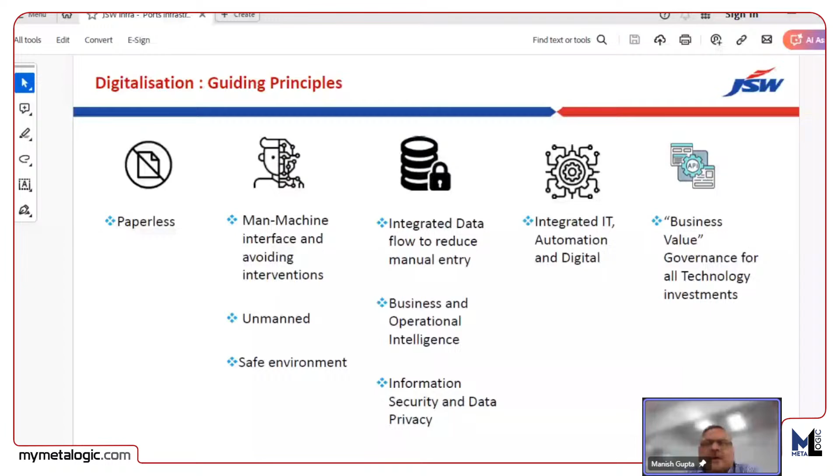So what we have done, I would like to explain. In our case, we have tried to ensure all the stackers and reclaimers in both our terminals are PLC controlled and SCADA based, and they have a control room wherein you can monitor their feed rate, the load rate of the conveyors, and the loading into the vessels, all sitting in a control room.

So just to explain what we have in a terminal: in our iron ore terminal, we have a twin tippler, a single tippler, connected to a yard through a conveyor line. Then we have yards where we have stackers, and stacker reclaimers as well, which can be used both for stacking and reclaiming. These reclaimers are used for loading into the vessel. We have two ship loaders with a capacity of around 7,000 metric tons per hour, so dominantly we try to finish loading a cape size vessel in about 1 to 1.5 days.

For utilizing this heavy equipment and the conveyor, we are trying to use minimal manpower, and all of this is done having a control room, where all the stop-start of our equipment as well as conveyors are controlled. We use a lot of RFID because many trucks come in for iron ore, along with the rakes, to connect the traffic, understanding what is moving out of the mines, and what is finally coming to our terminal, so that we can regulate traffic within our terminal premises as well as outside.

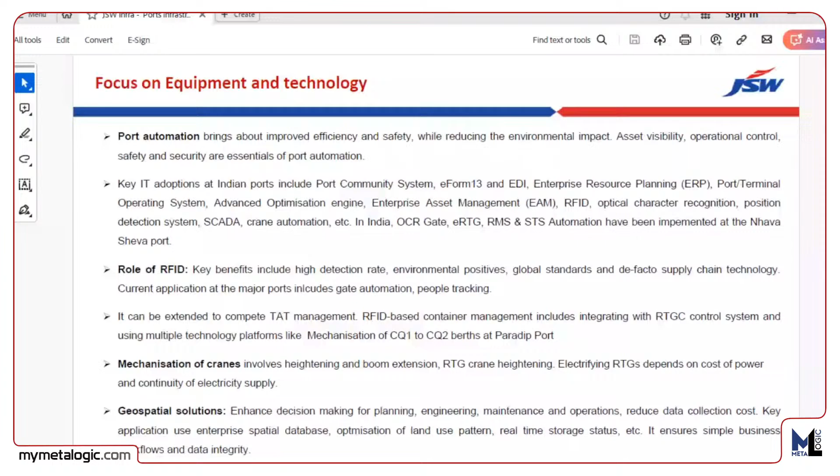Same way, we regulate our traffic of rakes by looking at the details available in FOIS, and this is integrated with our internal system.

We have mechanized cranes that are normally used for moving some of the items here and there within our premises.

We are trying to use geospatial solutions, where we map the storage area, and based on the profile of the storage, we manage how the stacking has to be done. Finally the equipment, the reclaimer, is guided as to how the reclaiming is done, so that it is more efficient and productive, because you spend a lot of power using this big equipment, and if you can maximize your utilization of this equipment, you save cost.

That's the whole principle of using the new virtual solutions and the equipment based on SCADA.

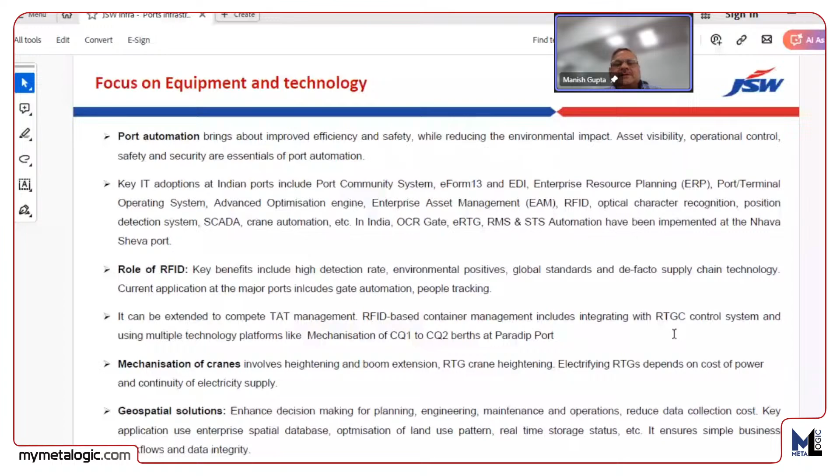When we make the architecture of the whole system, I am not only talking about a bulk terminal, but the overall port. First of all, it has to have automated marine operations.

As of today, all our ports normally have a tugboat and a control room where they come to know from the vessel that it has arrived, and the pilot along with the tugboat goes to get the vessel in. This can be better managed if we know what vessels are coming in, and this can be integrated with information to the various berths and terminals within the port. Thereby, the stoppage time of these vessels can be reduced.

Same way, we have automated gates for bringing in the containers so that there is no stopping or choking at the point where they enter the premises.

Then automated and remote STS for unloading containers, e-crane operation.

Smart rail operation is like what we do manually today, we try to get information from railway on where the rake is, and then manage the system inside. But if this can be integrated with our system, which has to happen in future, then our operations would be much better. I talked about the yard management, then integrated stacker and reclaimer, which we already have.

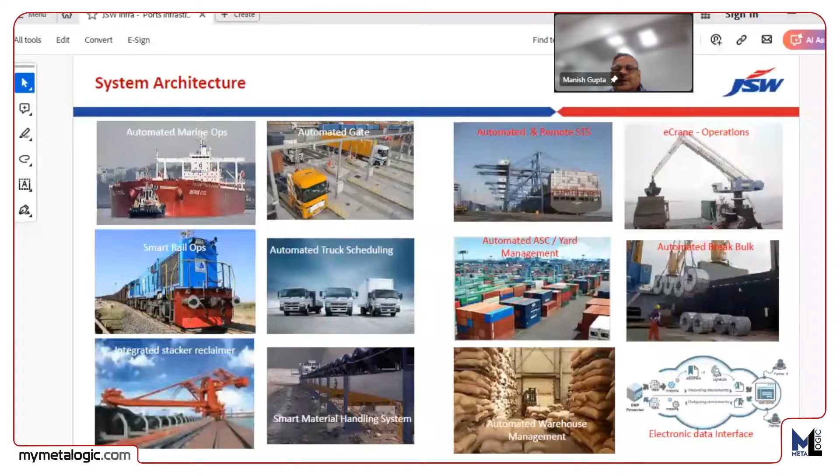If you see an integrated system, we have three parts: one is the terminal operation, second is the business operation management, and finally the business performance management. So marine operation or vessel operation, storage, warehousing, receipt, gate operations, all these things come under terminal operations, which we try to do by using equipment integrated with our IT systems.

Now the reports and functioning of a terminal, that is finance management, procurement and inventory, asset life cycle, project management, HR, sales, marketing, these are done through an SAP system.

These two systems have a common portal where the KPIs of the ports are managed, like the TAT of a truck, the TAT of a vessel, how much time it's going to take to load, and how much time we have taken between two vessels. All these parameters are governed so that we can improve by having this information.

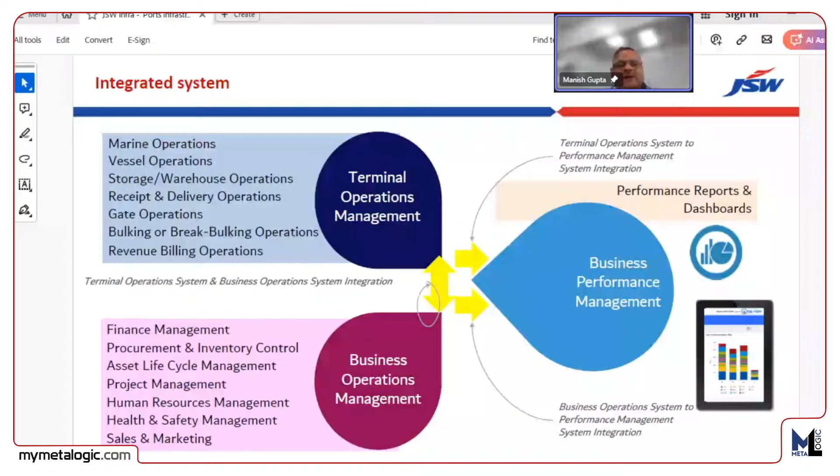So when we have a technology-driven port, we definitely have more productivity. One, we save time by tracking and monitoring. While using this equipment, the handling losses are minimal, and we use DFDS system and filtering systems so that the environment is protected.

If we are effective in bringing down the TAT, whether it's rake, truck or vessel, we try to bring down the pilferages, that is the damages, and thereby we become highly productive.

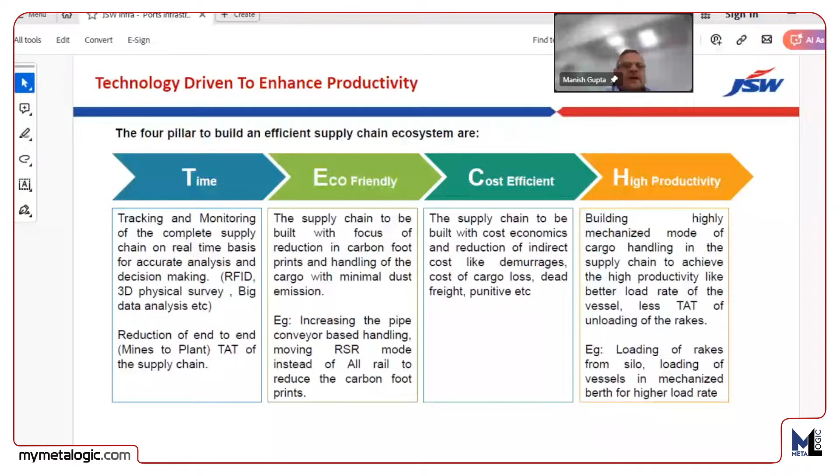Now, these are the things which are used now and are being advocated in future ports, so that the environment can be protected, and the cargo can also be protected, because if there is high moisture, it's very difficult to transport the cargo. And if there is more dust, the whole environment becomes dusty and it's not environment friendly.

So we are trying to make these kinds of structures, where our reclaimers and stackers will work within these structures and operate in the way they were operating earlier. The only difference is the environment will be protected.

I am also going to share some glimpses of our surveillance system, where we use digital surveillance and exceptional analysis. The whole port has a lot of cameras, around 200, which are Bosch cameras with analytics. If there is any deviation to the way things have to work, for example, if a person is moving around in an area where he is not supposed to move, there would be an alert and the security will sound off.

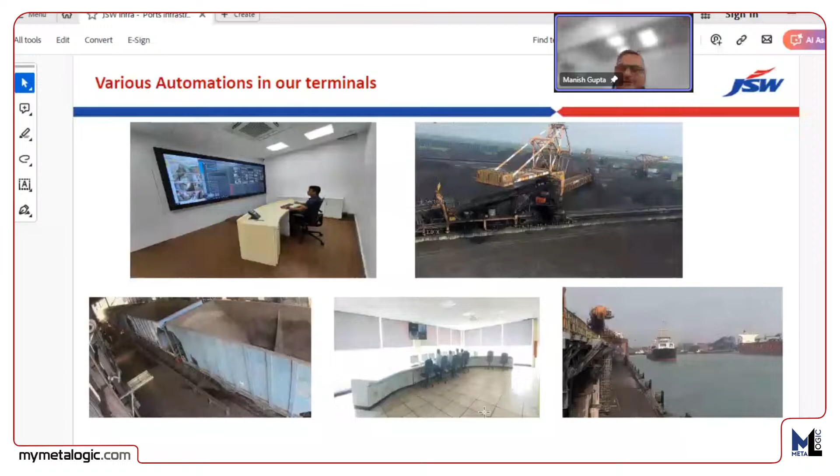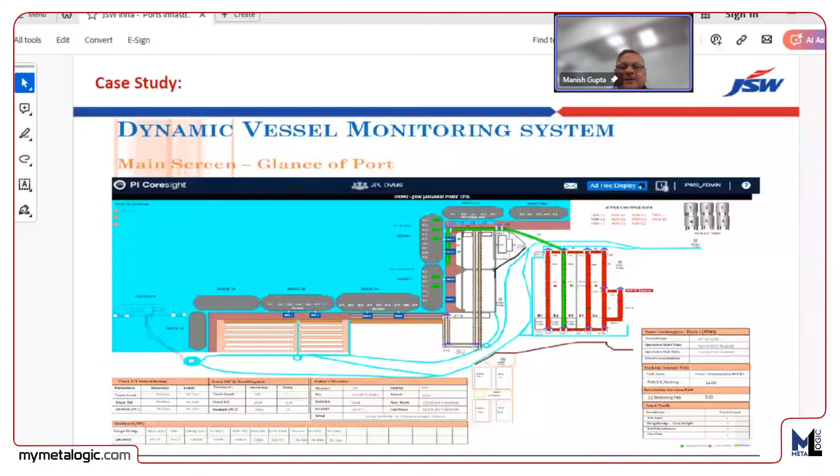So this is a glimpse of that. Generally, for a particular berth, it shows the various hatches, the quantity to be unloaded or loaded, and when it is being done, showing online in real time what unloading is happening and where, which yard it is going to, so we can be more productive. It shows which stacker is being used, which conveyor, from which hatch it is being taken out, and what time is being taken.

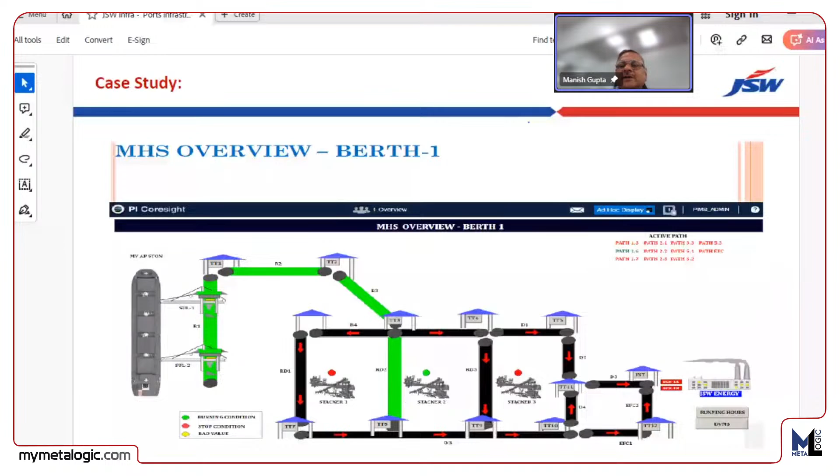So this was my presentation, a glimpse of that. But if you have any questions, please feel free to ask me.

There is a question from Mr. Saju Thomas. He wants to ask, how can we reduce the handling losses at port while handling bulk cargoes, specifically coal and iron ore? This is an open question where everybody can contribute.

Hello Mr. Saju. Basically, we have a lot of challenges in bulk handling where there could be handling losses. But if you compare these handling losses vis-a-vis manual handling, these losses are minimal. Now, how we can reduce the losses?

It depends on how the cargo is coming in. If in a rake the cargo comes in and by some chance has formed a slurry, the cargo sticks to the sides of the box and rake. We try to unload, but then there is still some cargo left over. But once it comes to the conveyor and then towards the plot, it doesn't fly anywhere because of the density, so the cargo is safe.

Because we are reclaiming again and it is going via conveyor to the ship loader, the cargo handling losses are minimal. So what we need to do is find a mechanism by which we can scrap through whatever is not getting unloaded because of the slurry or choking nature. If we can unload the total cargo within our terminal and bring it to our yards, then the mechanized terminals are the best to operate with.

So what we've discussed on this topic is the advancement of bulk material handling management at the port sector. We have taken 3 key initiatives: first, infrastructure and its development in ports for handling bulk cargo vessels; second, automation and digitization of operational activities handling the cargoes; and next, environmental concerns related to bulk cargo handling in the port sector. The first and foremost topic is how to handle a bulk vessel in the port sector.

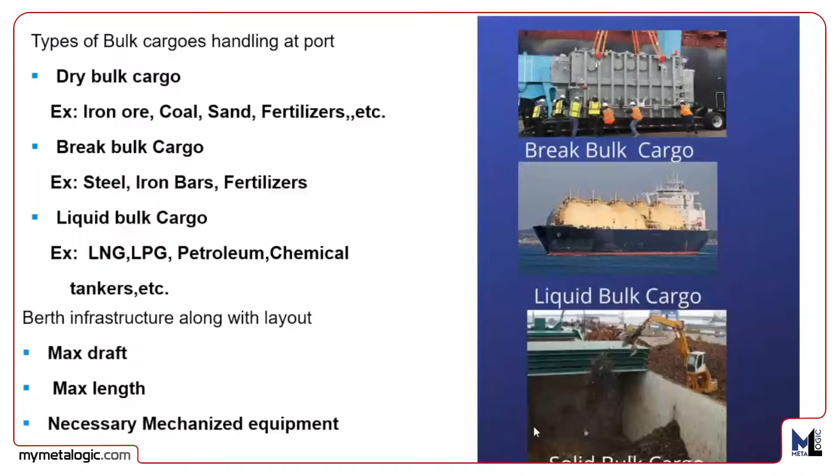Before that, I'd like to give a brief view of what bulk cargo is and what types of bulk cargoes we handle in ports. Generally, bulk cargoes in the port sector are dry bulk cargo, break bulk cargo, and liquid cargo. Dry bulk cargo is generally uniform in nature. Coal is an example of dry bulk cargo, iron ore is also a dry bulk cargo, and sand is another example of these kinds of cargoes.

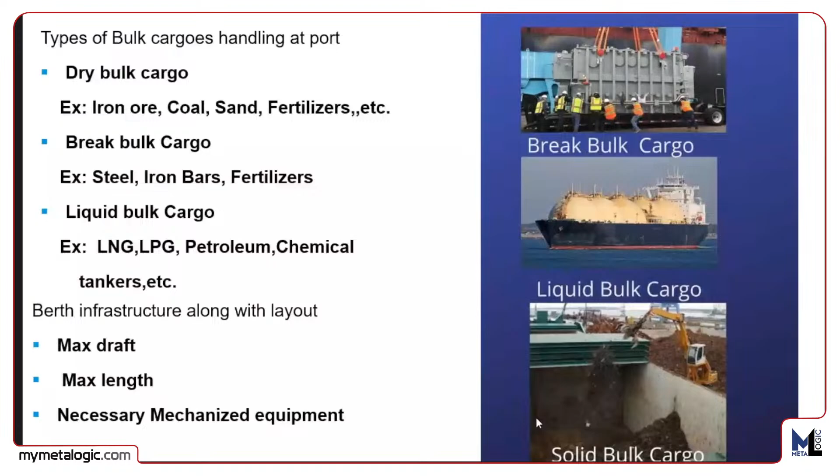This kind of cargo is uniform in particle structure and can take more volume in a single vessel, with geared or ungeared vessels. Generally, ungeared vessels handle more volume, bringing cargo from one country to another where resources are scarce. For example, we can export iron ore from India to China to overcome the scarcity of iron ore existing there, which is needed for manufacturing steel products helpful for our real-time livelihood. Next, liquid cargoes.

When we consider liquid cargoes - liquid petroleum products, natural gases - and chemical tankers, which bring bitumen, ammonium nitrate, and similar cargoes from one country to another, these can be transported through the maritime sector because it offers transportation at minimum cost compared to other sectors like railways, roads, and air cargo.

When we come to berth infrastructure, it must have capacity to handle bigger vessels and operate with maximum draft. The keel at the berth side must accommodate higher volume vessels, meaning 4 lakh DWT or above, handled freely without tidal issues. That's why draft is the biggest concern when handling bulk cargo vessels.

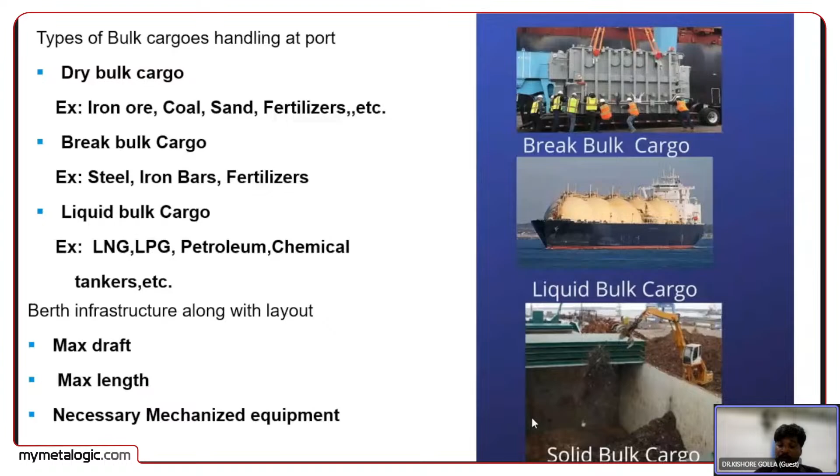The length of the berth must also be taken into consideration when handling bigger size bulk material vessels in the port sector. The equipment required for handling varies from one cargo type to another. For liquid bulk cargo, operations can use a pipeline structure, which connects the port berth directly to the destination location as per environmental safety and safety standards.

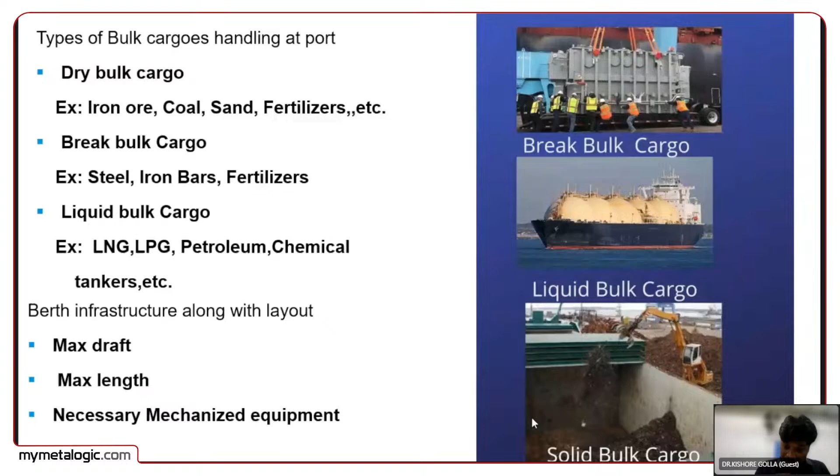For other cargoes like dry bulk cargoes, operations maximize the use of ship loaders or unloaders along with ship cranes, HMCs, connected with conveyor belts. The size of vessels varies from one cargo type to another, based on DWT, which must be considered for handling bulk material in the port sector.

For dry bulk and break bulk cargoes, the DWT changes and the size of the vessel changes accordingly. Handymax, Supramax, and Panamax vessels are mostly handled as per the infrastructure existing in Indian conditions, with allowable draft from 12 meters to 14.5 meters. To handle bigger size vessels at a port, you need to increase the draft and the length of the port infrastructure.

Generally, the port sector works on a timely basis, with charges mostly taken on an hourly basis. When calculating port performance, turnaround time and OSBD come into the picture, along with efficiency, which is considered when increasing berth traffic by handling more vessels to increase efficiency and key performance indicators of the port.

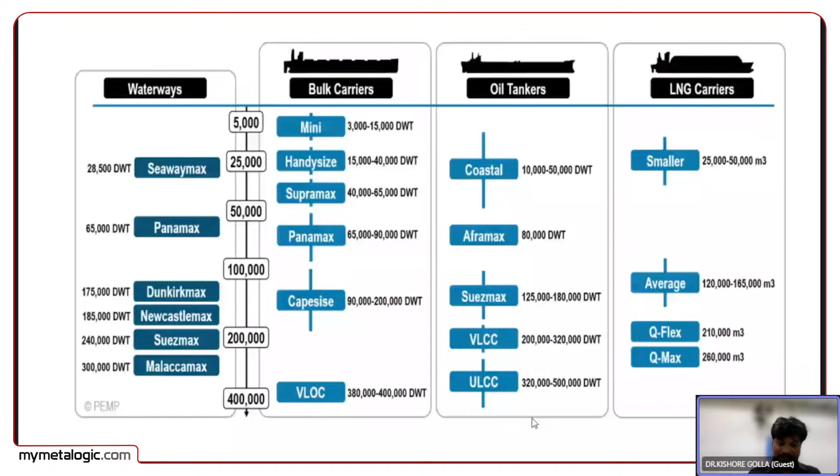Generally, the equipped infrastructure required to handle bulk cargo in the port sector includes ship loaders, ship unloaders, grabs, ship cranes, and HMCs, where we can handle a larger volume of cargo at a time from ship to shore and shore to ship, depending on the type of operation - either import or export.

The movement of cargo also takes into consideration the conveyor belt. For handling these kinds of things, this infrastructure plays a crucial role in operations - the grab capacity, the size of the grabs, and the mechanized equipment we use at that wharf or berth will help improve the turnaround time of the vessel, as well as OSBD of the vessel.

How much cargo we are handling on a particular day will be calculated based on that, and the specific gravity of the cargo also comes into the picture while handling the vessel, by increasing the volume as well as decreasing the time duration it is going to stay at the particular berth.

Next, storage facilities existing in the port sector. While discharging cargo from the vessel to the wharf, we need to evacuate that cargo from wharf to the allocated plot, either in open shed or closed shed, depending upon environmental conditions, or allocated space. This cargo movement can be done with the help of conveyors, or with fast-moving gate automation techniques, which help minimize traffic congestion in the port sector.

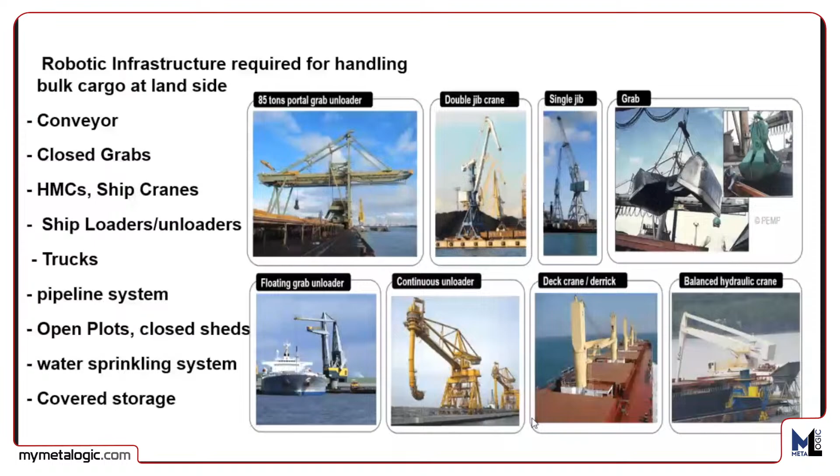Next, for movement of cargo through conveyor or ship loader, this can be done with the help of balancing the cargo, sprinkling of water or fog cannon machines for the cargo, to minimize the flow of cargo due to the nature of these cargoes, like coal and iron ore, which can flow kilometers away from one location to another, impacting environmental conditions in the port as well as city-based ports or port cities existing in the world.

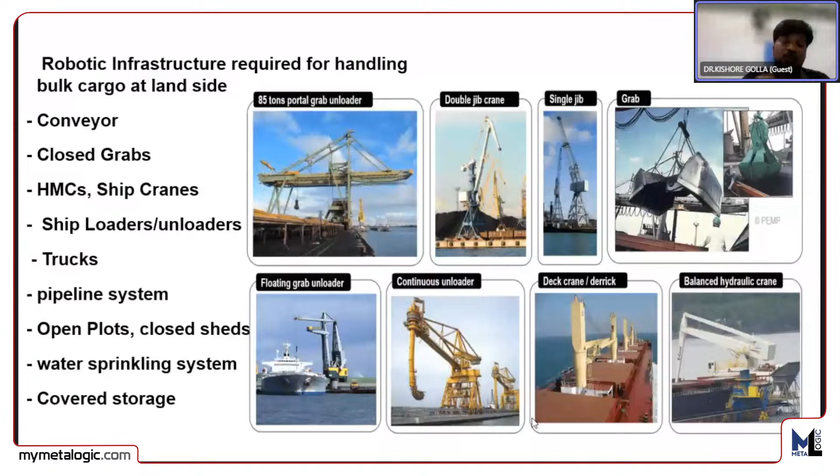The basic structure will be like this. Whenever we take any bulk vessel, it will come as ungeared vessels or geared vessels. If it is an ungeared vessel, it will come with hatches. Each hatch will have uniformity in nature and capacity to handle the same size of cargo, to balance the vessel's movement in the sea water.

To balance that cargo, we also give tolerable fog sprinkling or water sprinkling along with the cargo, like coal, iron ore, and others. Whenever the vessel comes adjacent to the berth, the ship loader or unloader comes into the picture, and that unloader takes the cargo and keeps it on the conveyor, which takes the cargo to the designated plots.

So considering these advantages, the major ports can show an interest to handle bulk vessels in the port sector to improve their performance standards. These standards will be taken as per IMO norms and MARPOL regulations, which will help us handle the vessels while minimizing the environmental constraints existing in the port sector.

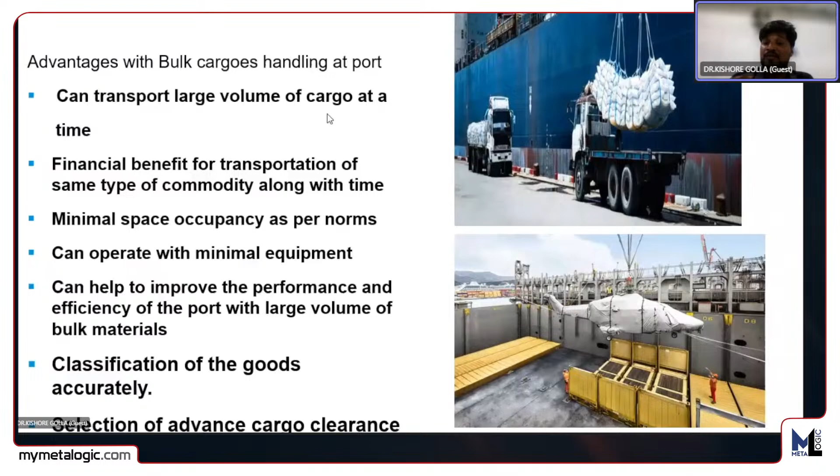Bulk material occupies less space compared to other materials. Take containers for example - you can operate with 20 feet or 45 feet containers, and based upon that the volume of cargo changes. Within that same space, you can operate more bulk cargo like coal or iron ore on a designated plot. Within that plot, there's a permissible limit you can operate within, but the volume will be increased compared to container cargo handled in the port sector.

Also, machinery helpful for R&D projects can be transported through the port sector only. There you can operate with a lower price for that cargo movement in the port sector, based upon the total tonnage taken into consideration.

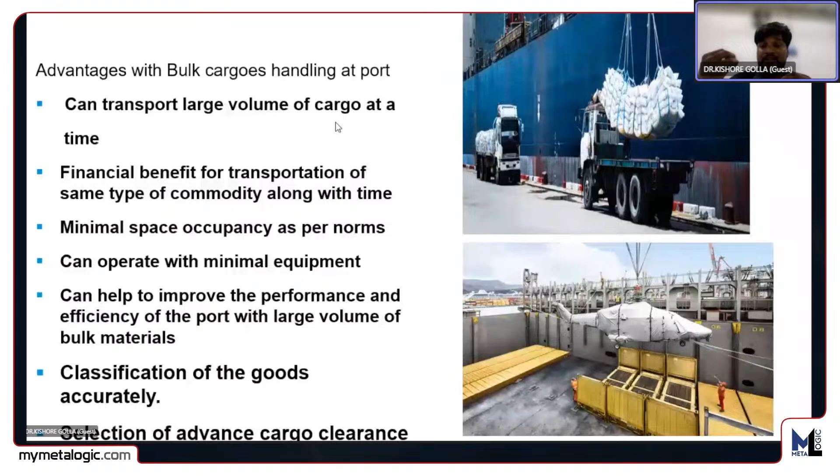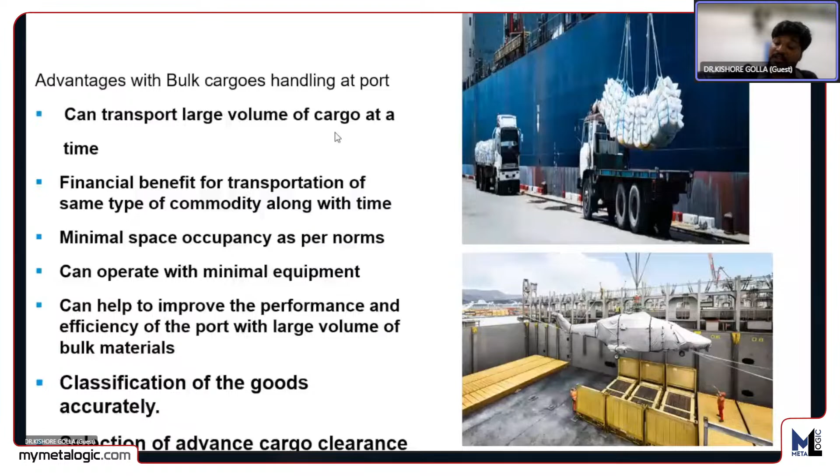Next, advanced cargo clearance. If you take bulk cargo as break bulk cargo, it can be kept in bag format - for example steel bars or fertilizers. You keep it in bags and transport those bags within the vessel as well as on the wharf side of the berth, to minimize cargo wastage, as per the earlier discussion with Manish Gupta ji.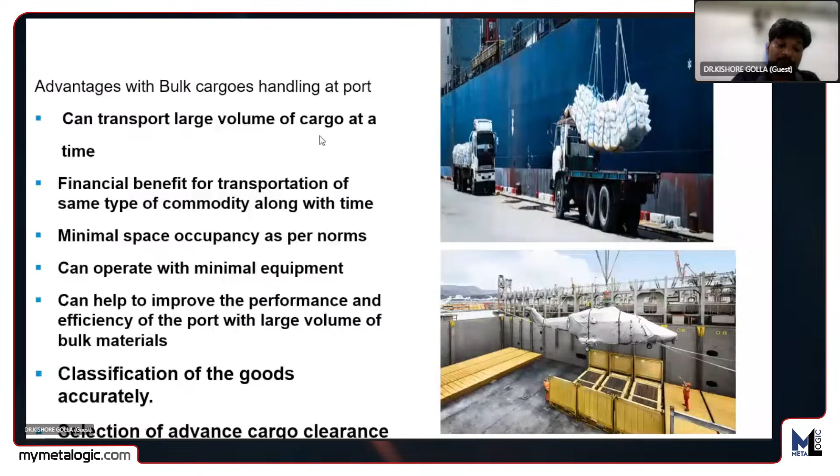You can see how the ship unloader handles cargo and transports it for trucks as well as conveyors. This helps as per standards with the closed conveyor - when handling that cargo, there is minimization of spillage of cargo when moving it through the conveyor. That point we have to note here.

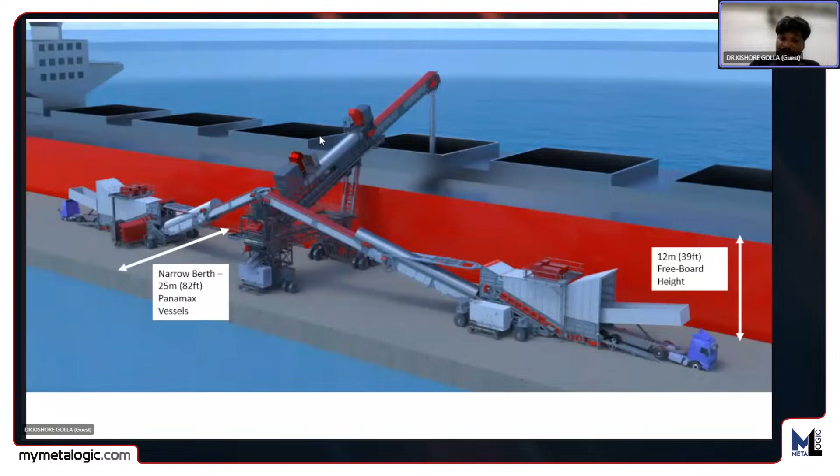When considering environmental concerns, as discussed earlier, dry bulk cargo can fly across kilometers away from one designated plot allocated for this dry bulk cargo, affecting the city or citizens living nearby, causing environmental concerns. That's the biggest problem. Along with that, there's a possibility of carbon emissions from firing of coal cargo, with combustion along with hot air.

Another constraint in bulk cargo material management is human capital. If workers don't have the technical expertise for handling mechanized equipment existing in ports for bulk cargo, there's a possibility of cargo spillage within the roads of the port as well as the infrastructure designated plot allocated for that particular cargo.

To mitigate these things, the existing technologies we can handle with automation, along with digitalization for vessel clearances - as Manish Gupta ji already shared in the earlier demonstration about the vessel clearance system for document clearance, what kind of operating systems are available presently in the maritime sector of India.

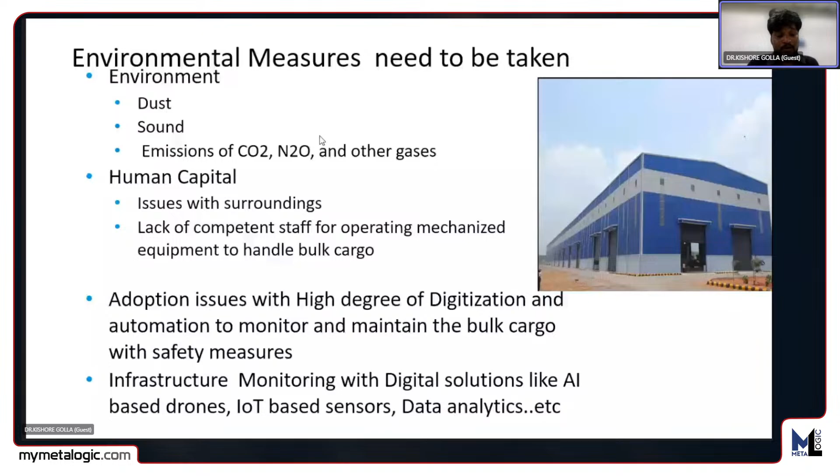To mitigate that, we have to give moisture - mixing water at a tolerable level to suppress the cargo to the designated location, and also to mitigate the combustion with the hot air which flows in the ports.

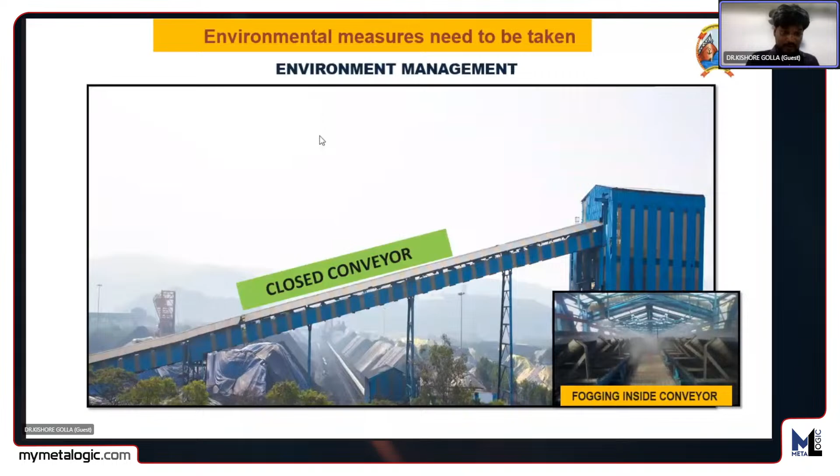Next, the one under environmental constraint: what we have seen earlier is that if you keep the cargo in the open manner, it can fly across the city. We can mitigate that flying with the help of closed storage sheds. Whatever cargo we keep inside the closed storage sheds will remain within the closed shed only, restricting the flying of cargo from the port to the city side.

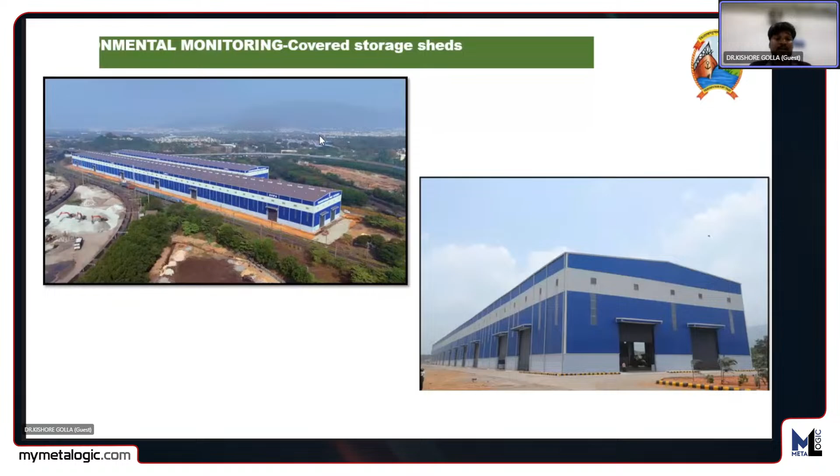No issue, I can keep that one, but I just want to show how practically this kind of operations are happening in the port sector. If you can allow me another 5 minutes, it will also be helpful for the audience to better understand the operations.

You can see here what we discussed now: the flying of the cargo as well as combustion of the cargo with the air. Both of these things you can see here. The smoke is coming due to the combustion, and also the flying of coal dust within the port.

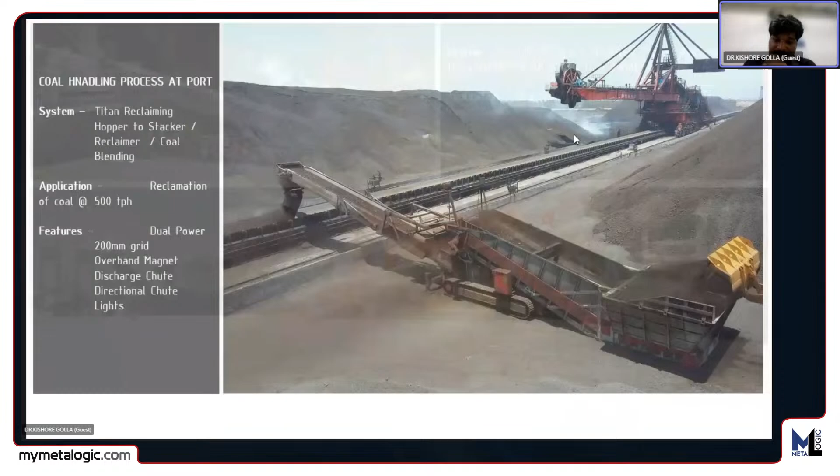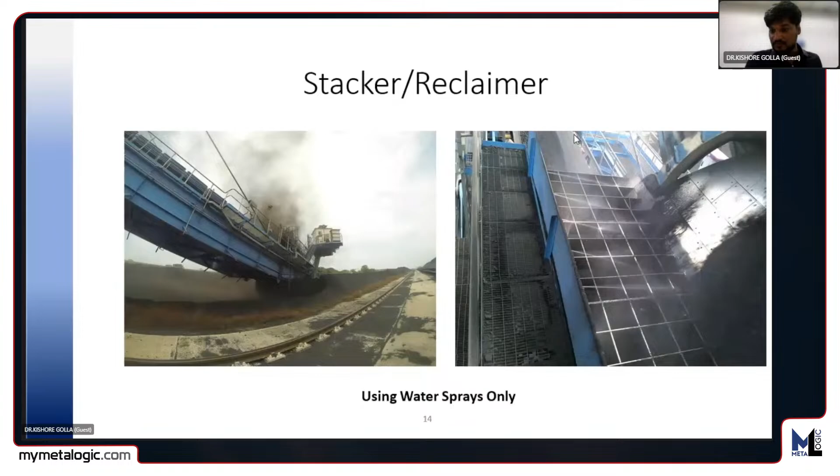And the handling of gypsum in the port, you can see here with the help of ship loaders. The stacker and reclaimers also transport the cargo within the port, and we can suppress the flying of cargo with the help of fog and the mixing of moisture.

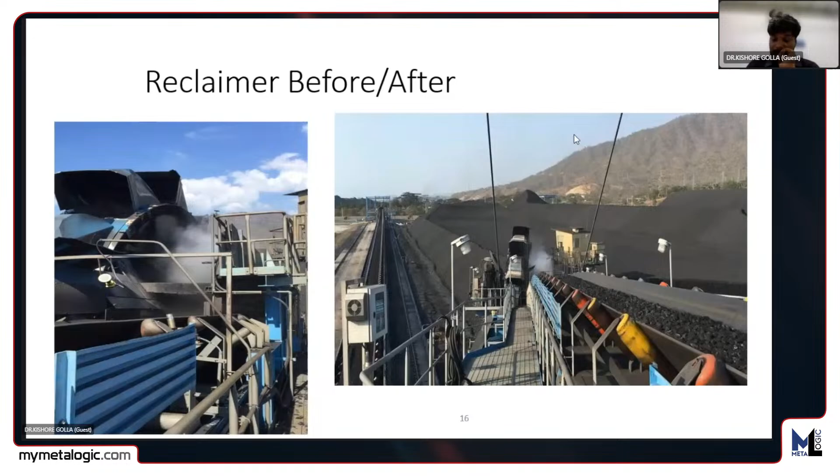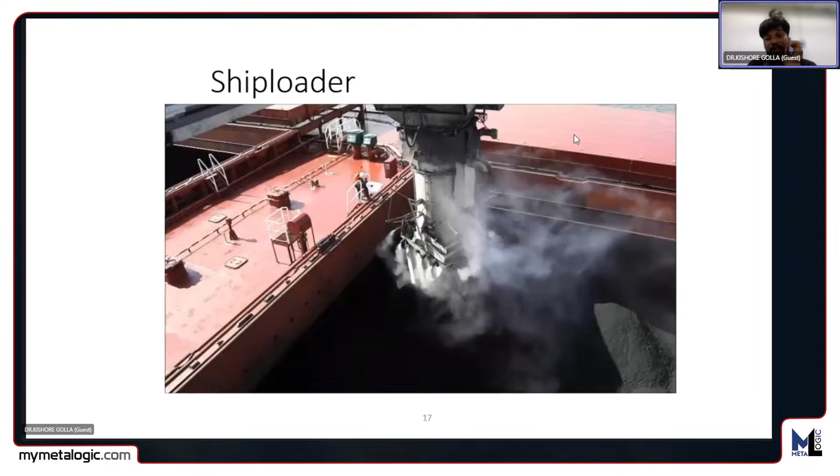These are the different kinds of techniques and mechanized equipment we use for handling bulk material in the ports. You can see here the loaders, how cargo can be loaded into the vessel with the combination of fogging, to a tolerable level, to keep the cargo balanced in the vessel.

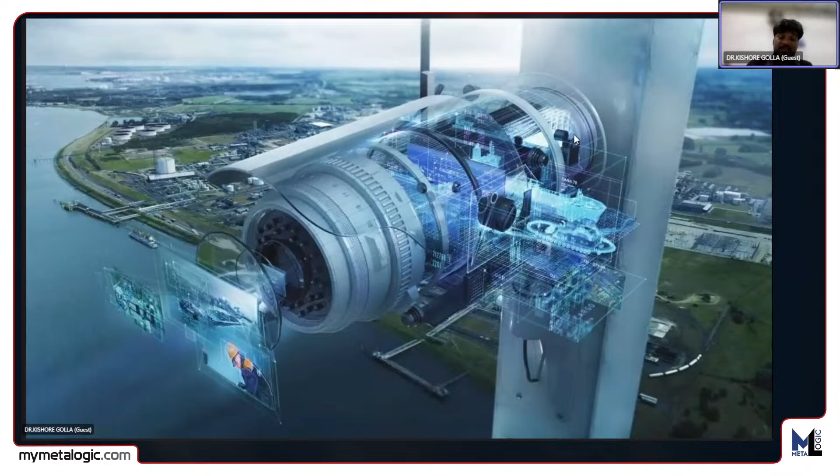Next, digital technologies available for us to handle robotic equipment used for handling bulk cargoes in the port sector. The first and foremost thing is that whatever mechanized equipment we've seen till now - loaders, unloaders, ship cranes, harbor mobile cranes, front loaders - all these can operate along with IoT based sensors, as per safety standards, for keeping safety inside the port as well as for handling cargo by keeping preventive measures.

So when handling mechanical equipment, you cannot see faults within the mechanized equipment since it is at a micro level. We can check this kind of thing with the help of technologies - AI-based drones or IoT-based sensors - which are fixed on the mechanized equipment within the port, and can be monitored with the help of the command control center.

You can see the processes we are taking for automation and what kind of operations we are taking for digitalization. And when we go for these kinds of things, what applications are we using for keeping them in digital operations and automation operations and all.

So when we keep all of them, generally CCTV surveillance is taken into consideration for safety standards, for monitoring unauthorized occupancy and unauthorized access within the port, as well as for monitoring the safety of workers by keeping IoT based sensors, as well as by keeping drones in the flying zones within the port sector, within the geofencing locations allocated for the particular drone.

You can see here the port community system can be helpful for you to take document clearance. It's a single platform which can be called a maritime single window to operate that. And when we go for port management, whatever operations we are doing - marine, cargo, traffic, storage, and other kinds of facilities we provide for these stakeholders - will be kept in the port management application.

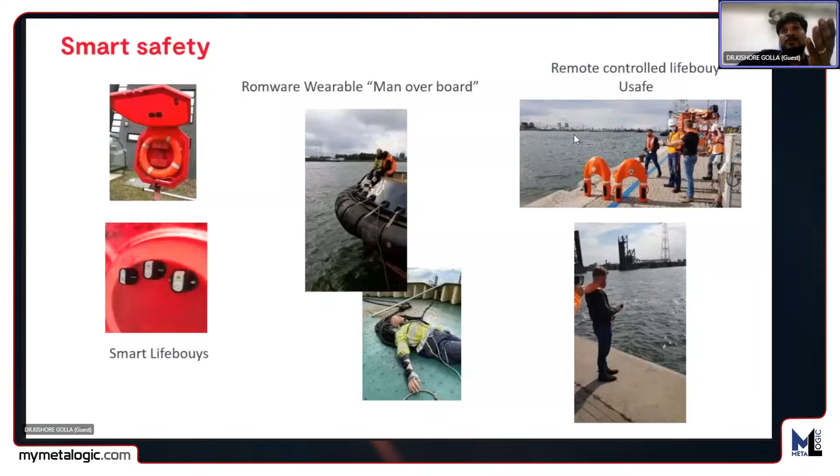Even for front loaders, the same can be kept, when handling bulk cargo or break bulk cargo alongside the wharf before exporting the cargo to the vessel.

Next, drone-based systems. These AI-based drones help monitor preventive measures as well as incidents occurring within the ports.

Sorry to interrupt, Dr. Kishore. If I may ask you with regards to this PPT, have all these technologies of safety and digitization already been placed at Visakhapatnam Port Authority, or is it yet to be done?

This is an important point you have mentioned, madam. But the thing is that these kinds of technologies are presently in the early stage, that means the infant stage. So once the technology is proven, we can adopt it.

But AI-based drones are already available in the port sector, and VPA is planning to operate these AI-based drones to prevent environmental concerns, like the flying of cargo dust from within the port premises to the city side, because Visakhapatnam Port Authority operates adjacent to the city, where a lot of people are living, with environmental concerns arising from the port.

So that is the first and foremost point. Then the second one is, I'm asking you just with regards to last week, we had a webinar on drones and AI.

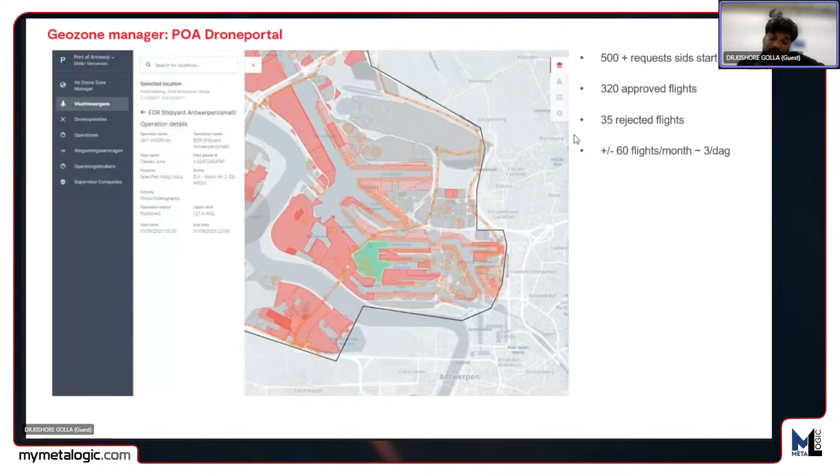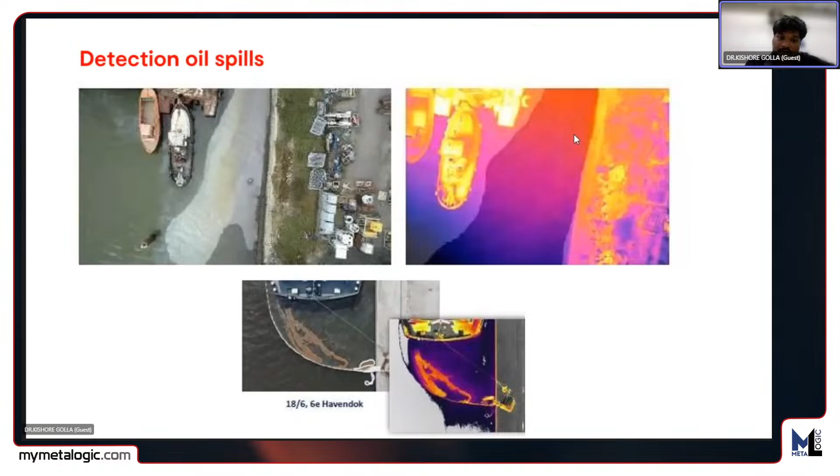Here you can see the oil leakage from the LPG vessel, and how it is going to be monitored with the help of the drone. This is the geofencing coordinates given for this AI-based drone, and how it detects and marks where the oil spillage is happening adjacent to the LPG vessel handling at the port. This digital twin is also helpful for improving adoption of technologies within the port, along with the parallel manual operations, for minimizing wastage and improving efficiency.

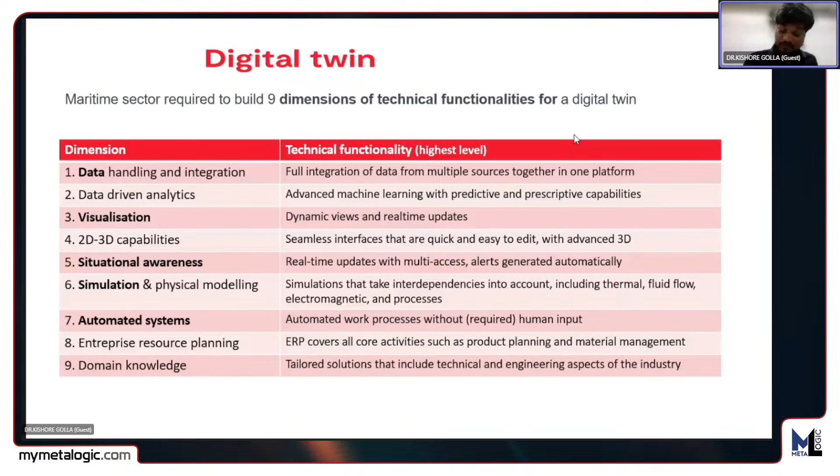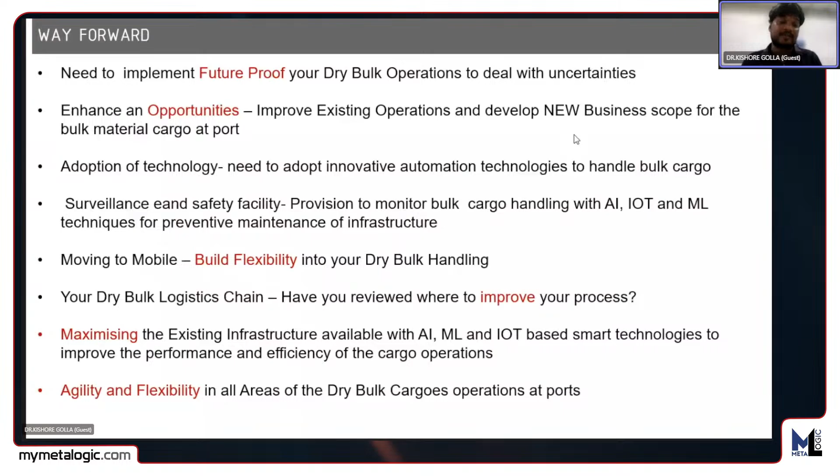These are the key points required for improving bulk material management and handling in the ports, and these are the way forward for bulk material management in the ports. Thank you all for giving me the opportunity to discuss bulk material management in ports, and how VPA has already adopted handling through closed conveyor systems, HMCs plus ship cranes, ship loaders and ship unloaders for bulk material handling, along with environmental consent and guidelines issued by CPCB and MARPOL on a regular basis.